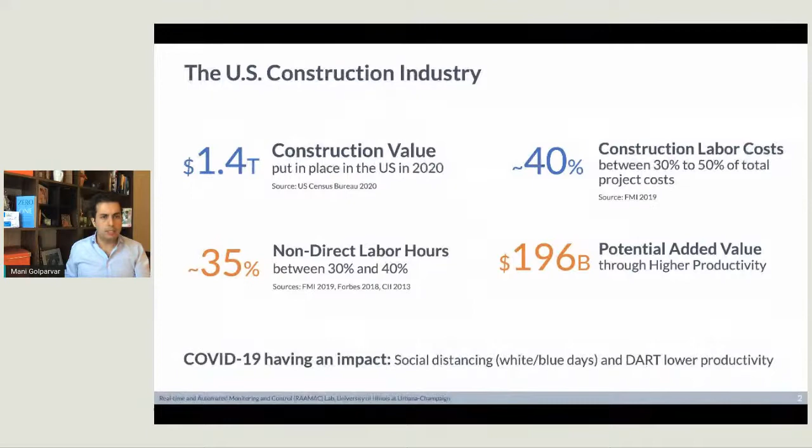But while you see all these numbers, it would be really nice to put them into the context of construction projects—and what that means is impact on the bottom line, schedule and budget.

There are a number of reports over the past few years showing that a significant portion of our commercial projects exhibit performance that leads to finishing behind schedule. A report published by ENR, Dodge Data and Analytics, in 2016 shows that more than 53% of projects in the United States are currently behind schedule, and roughly a little over 60% of them are over budget. When you go beyond commercial projects, ranging from about $10 million to a few hundred million, and get into mega projects beyond $500 million, McKinsey shows that 98% of these projects suffer cost overrun, and a large percentage of them are late. That's quite significant in terms of the performance that we have.

Now, ironically, if you ask owners across the various metrics we have in construction what they care about most, they would respond saying schedule. This is data coming from Dodge Data Analytics. For somebody like me with a construction background, this was actually a little surprising. Of course, no owner would not be concerned with the budget or cost of their project. But in construction, we have many strategies through contracting to control budget. Quality is dictated by the specification of our project. And when it comes to safety, we've hired our contractors and rely on them to keep the job safe. Design is another question asked in the design phase.

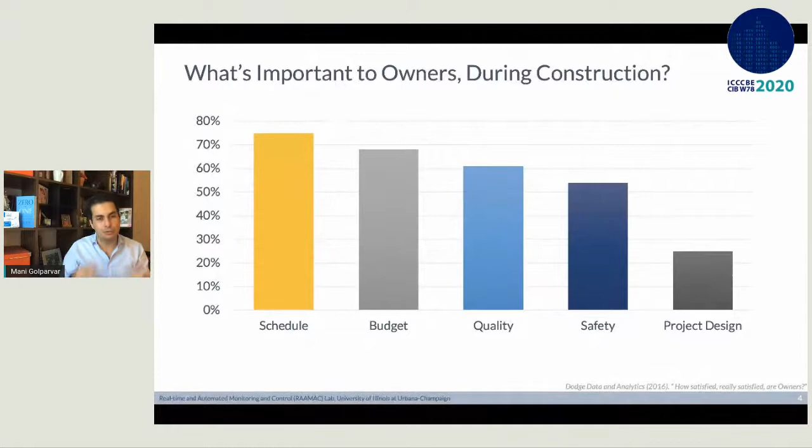For us to better understand why this is really happening to the bottom line of our projects, I want to take you back to what we do in construction in terms of project controls. For many years, we've been promoting how we can support projects by enabling systematic planning practices, performing monitoring, and adjusting performance. Over the past decade, we've seen a surge of projects where lean construction concepts are being adopted and adapted. We take projects through pull planning processes, make the work ready, and try to educate teams on who does what work in which location through daily huddles, and see what we can learn from that performance and improve the basis of the schedule.

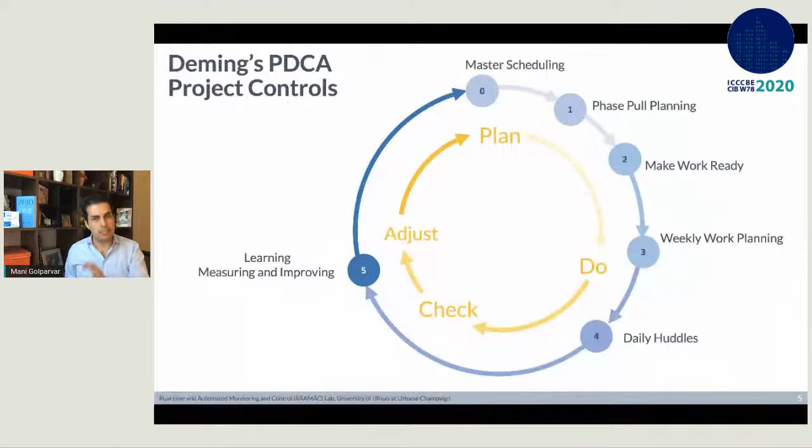So in the context of planning, monitoring, and control, there are four specific problems impacting our performance on planning and execution of projects. Number one: as an industry and academic community, we've significantly improved the basis of how projects can be planned. The concepts of planning and scheduling have been around for quite some time. Over the past, as I said, 10 to almost 15 years, we've seen a lot of these concepts from the lean community actually being practiced today in construction projects.

But anecdotal observation from a large number of projects we're engaging with today shows there's huge room for improvement. Many of these projects where we're bringing in best practices rely on champions to make sure people follow the new culture of adopting lean practices. Many leading researchers in our community, including Rafael Sacks and others, have published a number of publications showing that in the absence of these champions on the project, there's always an opportunity for the project team to revert back to old control practices. So we will not be able to support that.

The second problem is, while we create plans, many of our construction projects and teams are unable to execute the plan. In my lab at the University of Illinois, over the past 14 years, we've been capturing data on the root causes for delay that are impacting plan performance. And there are many reasons. Plans keep changing on job sites. Teams would walk into a room and the work area is not available to them.

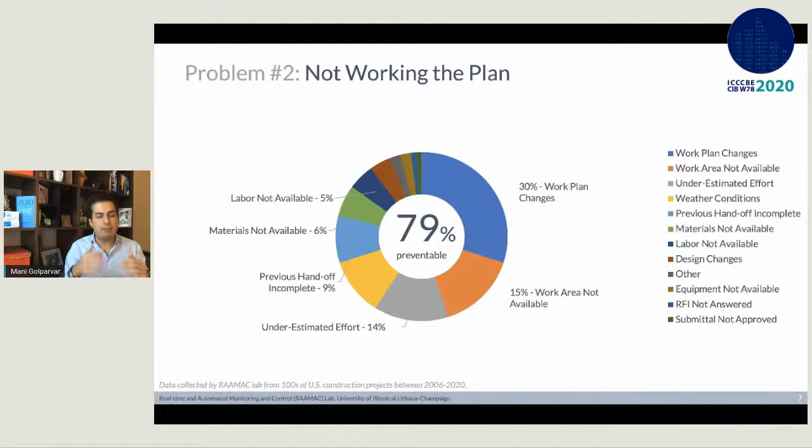Productivity is being underestimated. We have inclement weather days that's impacting it. Our analysis shows that 79% of these root causes for delay are preventable. All we need to do is make sure that the project team understands where the problems are, and they have an opportunity to address those problems proactively.

The third problem has to do with communication and how we measure performance. Many of our job sites, ironically in 2020, still rely on 11 by 17 sheets for people to walk around the job site in color-coded drawings showing how much work has been done in various locations. Of course, we've looked into digitalization, and now people use iPad and Android devices to electronically capture this. But basically what happens is we rely on people to walk around the job site, do the documentation, and oftentimes we don't have an opportunity to communicate that before we all get together in a coordination meeting.

So essentially, from the time the problem happens to the time the owner, contractor, and the subs really understand where the problems are, we've effectively lost a week of work. Now, map this out in the context of the data center projects that I mentioned, you can actually see there's a huge room for improvement with respect to communication and performance measurement.

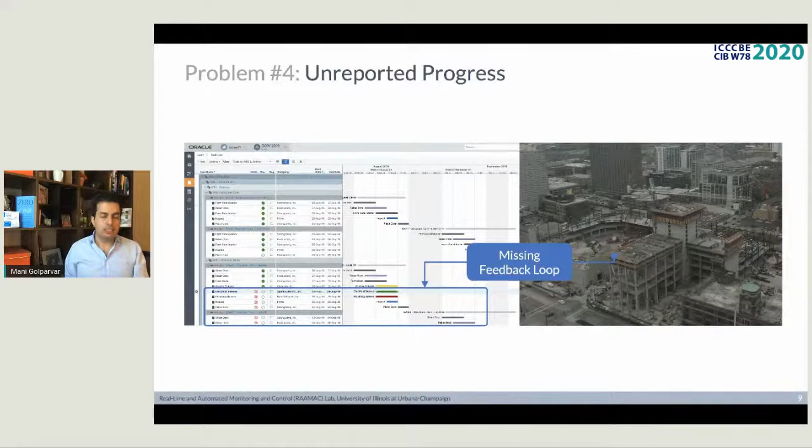And the last problem has to do with unreported progress. Still in 2020, many construction projects rely on regional directors for scheduling who come with these schedules, and they rely on these individuals to go back to projects and help improve the basis of their schedule. What is really missing is that feedback loop to make sure these individuals understand what happens on the job site, bring that data back into the schedule so they have actionable insight that can be used as a basis of improvement. So in the context of these four problems that I mentioned, I was really fascinated to see how we can address them by tapping into emerging and existing data.

I really didn't want to change what we do today with the type of data we have on the job site. So from one end, I was really fascinated by BIM, given the background I had roughly 15 years ago when I was practicing BIM with some of our colleagues at the University of British Columbia, measuring ROI for MEP coordination.

But I was really interested to see how we can tie that into schedule, not just as a 4D BIM, but rather a 4D BIM that matters to superintendents at a production level. So we can set a visual representation of what is expected to be done on our job site every day. We know who does what work in which location, and what is the sequence that needs to be monitored proactively on the job site.

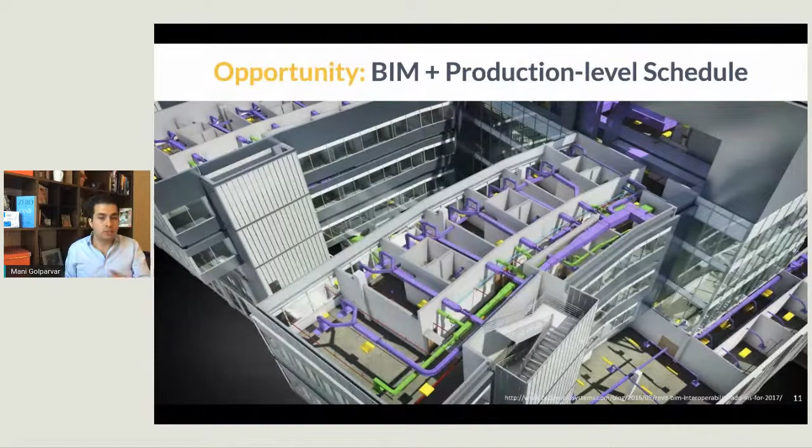Using action cameras or 360 cameras for indoor videotaping is extremely popular these days, especially with contractors in the US. We've seen a surge of drones over the past five years that's basically a commodity now—you fly them and you have the opportunity to capture this visual data. And of course, for more than a decade, as a community we've been leveraging laser scanning capability, but perhaps at a lower frequency compared to other types of data you see.

So what I was really fascinated by was how we can tap into BIM plus a schedule to represent what is expected to be done, and tap into these images and videos that everyone on the job site understands to represent what is exactly happening on our job site. So basically, I wanted to come up with this type of representation where we take BIM, connect that to the schedule, and overlay that on top of our photograph.

So by looking at one picture, if you're the owner, the contractor, or the sub, you can understand what areas are on schedule and what areas are problematic—whether these are actual problems that have happened on the job site or potential problems that are about to happen.

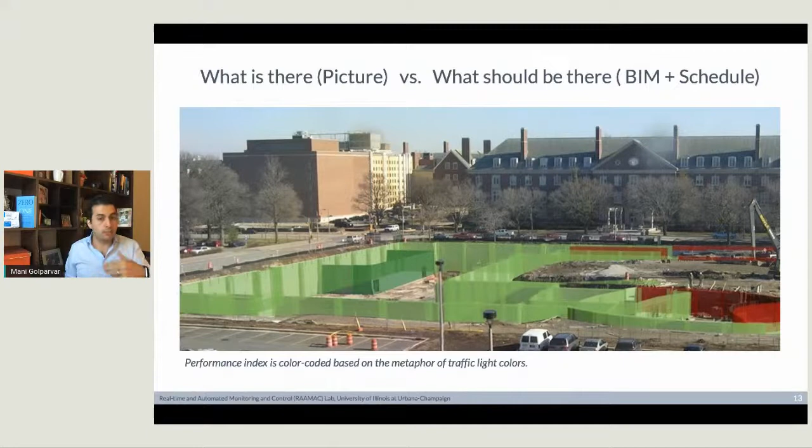And maybe you have an opportunity to proactively address that issue before it happens on the job site. So in the context of that, my research team has been working on the theoretical foundation for a project control system that I would like to call data-driven. But not every type of data is visual.

So of course we wanted to see if we can automatically generate these visuals that we have, see if there's a way that we can automatically align our BIM, or rather 4D BIM, against the photographs. Now, in earlier days, we were tapping into time-lapse photography, and it was rather straightforward. We could tap into some straightforward perspective-n-point algorithm methods that would bring BIM into alignment with one image. And because the camera is continuously taking images, your sequence of data would always be located in the right spot in the context of the image.

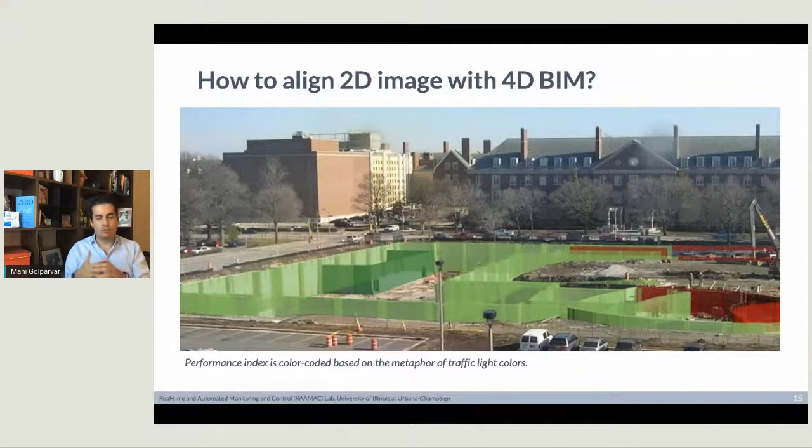But then immediately we realized we're always limited to whatever you see from the field of view of the camera. What is going to happen indoors? We always want to capture images from areas that matter. What can we do with the wealth of images that are being captured around the site? These days, people are flying drones, they're taking images with cell phones, the 360 camera, and nobody wants to use multiple systems. Everyone is passionate about one integrated environment where you can actually map your entire visual data against that design.

So the question, in more academic form, was how are we going to be aligning these images against our 4D BIM automatically? Now, for those of you who may not know much about computer vision, what we do dominantly is use a model which we call a pinhole model for representing images. And what that means is we map out intrinsic and extrinsic parameters for every camera, that in mathematical form is an 11 degree of freedom problem that would map every individual pixel in the image against a position in space in 3D that will be represented with X, Y, Z.

But then this would have required us to understand how every feature within the image matches against BIM at different levels of granularity, which was not easy because, as we all know in civil engineering, modeling is a task of creating an abstraction of the reality of the site. So we mapped the problem slightly differently.

We said, what if we come up with new algorithms, or a pipeline of algorithms, that would automatically organize our images in a three-dimensional environment, generate a 3D representation of the site, find location and orientation of images against that? So now our problem from an optimization perspective has grown. Not only do we have to solve for the cameras, but also we need to find that 3 degree of freedom representation for every point that is going to be mapped in this point cloud representation that we have on the site.

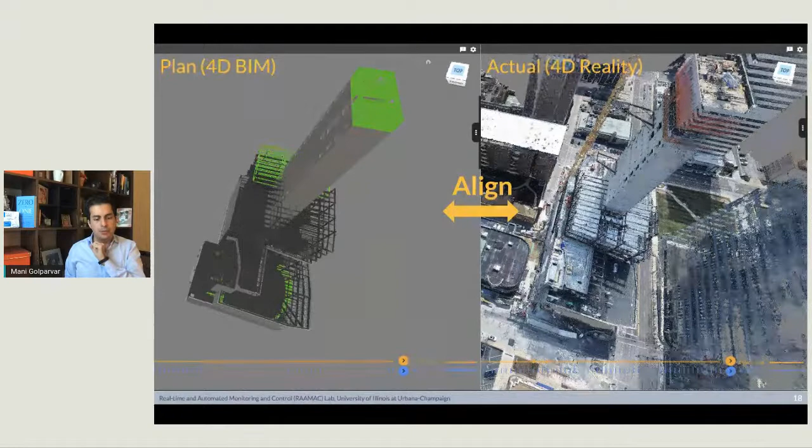Once we achieve that, we will be able to have the reality of the job site on one side, and the BIM plus the schedule on the other side. And then we can work on algorithms that can bring the two into the same environment, where now you will be able to overlay your BIM against that reality.

Now, this entire scene would be in a three-dimensional environment, but I also wanted to do this for images, because if you talk to superintendents, foremen, field engineers, you would immediately realize that they're not very keen to leverage point cloud data directly.

Rather, they like to interface with that data through images and use the point cloud as a basis of measurement. Because we are actually solving for this 11 degree of freedom problem for every image, we now have an opportunity to use that transformation and back project our BIM model into every image.

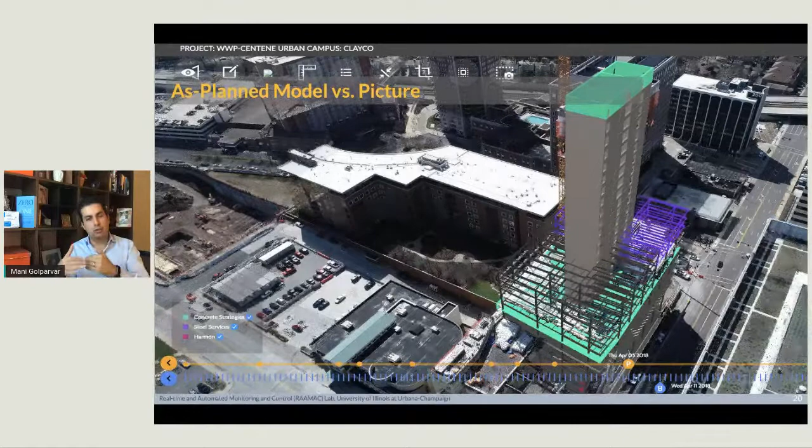So now essentially we can generate augmented images without using any dedicated hardware, where you can exactly see which pixel in the context of the image would match against which element, location, and work package in the context of your model. And all that mapped against the timeline slider.

Once we achieve that, we can start comparing the two in the context of the schedule and see what techniques we can come up with that can automatically color code models - areas, work packages, locations, whatever granularity you want - color coded in red for delays, areas that are on schedule in green.

Not only did we want to understand what has gone wrong or what has gone according to the plan in the past, we also wanted to forecast this into the future. So we wanted to see if we can come up with a body of new algorithms that can forecast risk for potential delay in the future.

So when the project team goes into the coordination meeting, they can really rally around this location that's been color-coded in orange and say, what are the root causes for delays that are happening on this location? What are the constraints that we have? And how can we revise these schedules so we have a more reliable performance? Then perform your weekly coordinations around this meeting.

This system has been scaled today, and it's being used on hundreds of projects in the US and around the world. I'm just showing you one example, and I'll get into the details of that in a moment.

This is with Clayco Construction Company in the state of Missouri, United States, where you can actually see that behind the superintendent's head, the system is being mapped, and there are two locations color-coded in red and yellow. These locations are at risk of delay, and the team is really rallying around these locations.

All the subs and trades that are engaged in these locations are discussing what are the root causes for the delay, what are the things that are not going to start on schedule, so we can proactively avoid these problems before they happen on site.

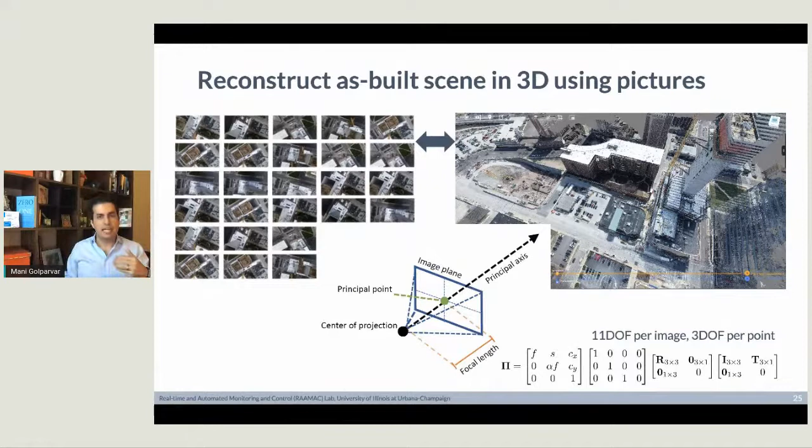So I've already given you a sneak preview of how it looks like, but again, we map this into a computer vision problem, a study that we call structure from motion, in terms of understanding what is the motion that we have between these frames, understand the overlap that we have, and see if we can map that out into a 3-dimensional environment. So we try to do that first.

Then we wanted to work on algorithms that can bring BIM and reality into alignment, and then work on computer graphics algorithms that can simply back project the BIM model into the context of our images.

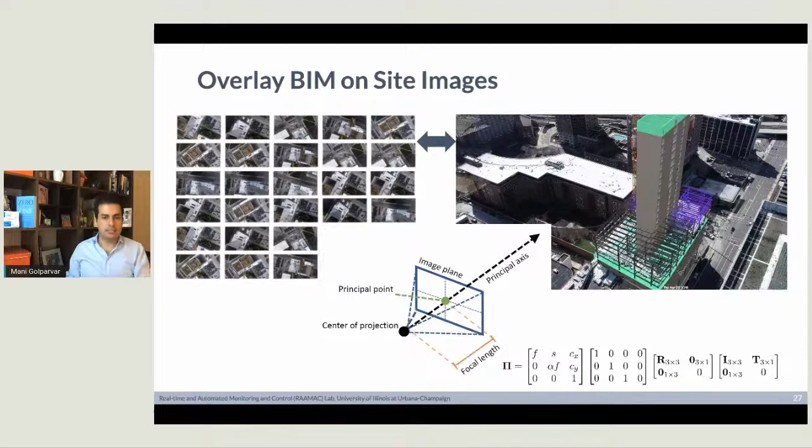So now mapping this out in the context of a computer vision problem, that means our input would be images, and perhaps in these images we can perform what we call a feature detection procedure that can find certain pixels with certain mathematical characteristics that are distinct enough that we might be able to find them in other images.

And the output that we're expecting is the structure, which is the 3D location of every one of these points that we've observed, and also understanding the motion, rotation, translation, and possibly intrinsic parameters of these cameras.

So we can actually map this out in terms of an optimization function where we will try to initialize the problem by triangulating the points in the 3-dimensional environment and then back projecting them in a 2D form. So let me stay at a really high level and walk you through the procedure.

So more than a decade ago, we started working on these algorithms that treat every one of these images that we have on the job site, regardless of how much overlap they have, to see if we can find these distinct features.

Then we wanted to see if we can find a mechanism by which we can match them in a pairwise fashion, see if we can find consistent motion across them through some model fitting algorithm that we call RANSAC. Fundamentally, we will be looking to fit an epipolar geometry that in computer vision terms we call the fundamental matrix, which guarantees that we are not being challenged by the redundancy we typically see in the design of our infrastructure systems.

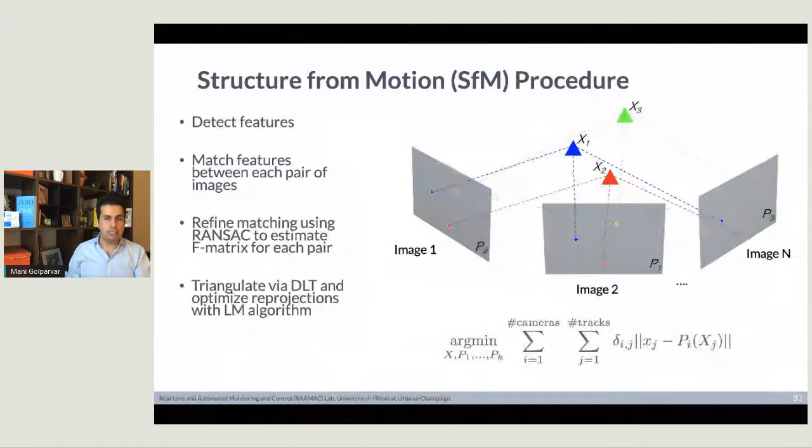Once we have these tracks formed based on our features, we will be able to triangulate them using direct linear transforms, back project them into every one of our images, and solve for this optimization problem that I'm showing you on the screen using a Levenberg-Marquardt algorithm.

What this procedure does is give us an initial representation of the points in 3D, and it finds the right orientation and viewpoint of every image in our three-dimensional environment. Then we will be able to use this in a pipeline of dense reconstruction plus model fitting capability.

What that means is that we will look into photometric consistency across our images. This type of method requires structure from motion output, what I described before, as an input to the process. So we can actually triangulate these positions in a three-dimensional environment, and generate the basis of a dense representation of the scene.

Now, obviously, because of the limitation we may face in terms of visibility, we want to fit surfaces into certain holes, and there's a whole body of algorithms for surface reconstruction. For example, you can fit what we call Poisson surfaces into the generated models.

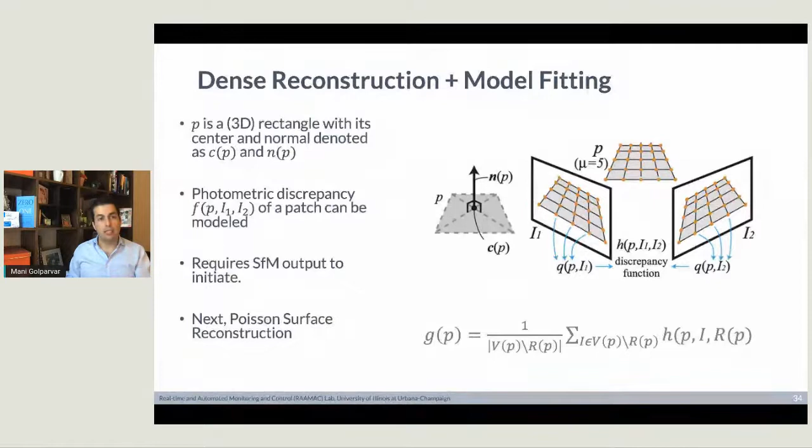So once you apply this set of pipeline algorithms, a structure from motion followed by some form of multi-view geometry, and some form of a mesh modeling algorithm, you can actually provide deliverables for construction projects. And these deliverables will be the following.

Regardless of how images are captured, whether with a drone, a 360 camera, or a camera fixed on a tower crane, we will be able to map the job site in a two-dimensional form, 2.5D, which is an orthophoto with depth information, and at the same time map that in a reality scene. So I want to show you one example from the project I was showing you earlier.

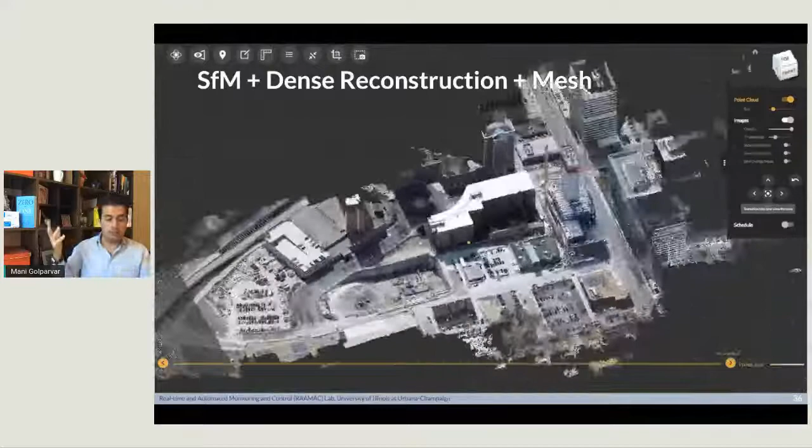If you recall the project where the team was gathering on the largest screen, it was actually a $150 million project in St. Louis. You can see a high-rise structure on the right side, a concrete structure with a parking garage on the left side, with that big excavation hole you see on the corner.

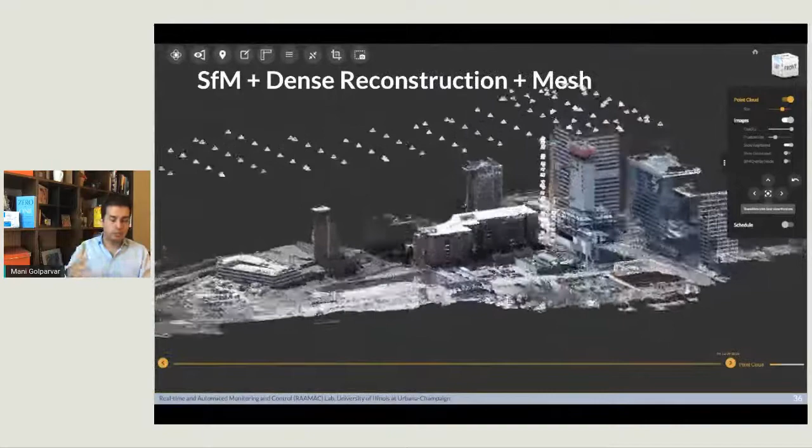In this case, all kinds of images were being uploaded into the system—images taken with a drone, images taken with a cell phone—and the combination of them is being mapped into a three-dimensional scene. It gives you this image-based experience where you can click on every one of these individual images and dive into a high-resolution image.

And on that image, because you have the point cloud as the backbone of your system, you can perform measurement. You can measure length, you can measure areas, volumes, and use that as the basis of your communication.

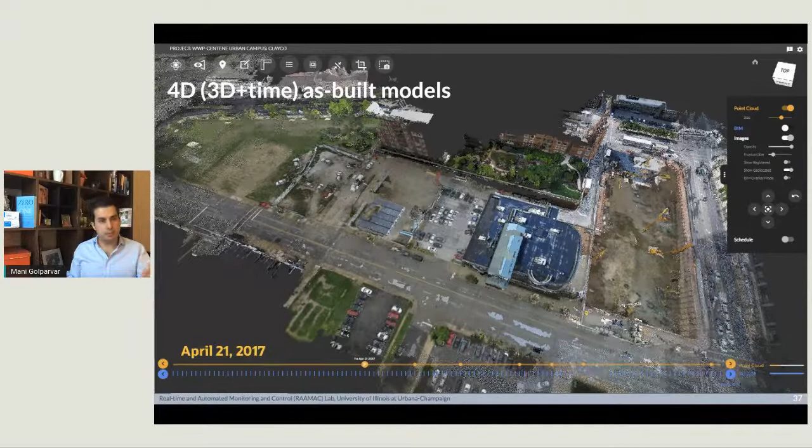Of course, we wanted to do this over time, so maybe the team would be interested in performing the capture once a week, or maybe it's a fast-paced project, so they want to do the capture every day. So we wanted to create a scalable architecture that would let this type of system work over time.

So we worked on a number of algorithms that would tap into this type of consistency that we see in features, because not everything changes every day. And we created a KD-tree structure around these feature descriptors, roughly a 128-dimensional vector space, and we would adopt a number of search algorithms.

In this case, for example, we use a fast approximate nearest neighbor search, and we would use that in the context of an optimization process. So every time a new set of data is captured, we can actually use the model from the previous capture.

What we would do is match the features from the new capture against that. And when we are running the optimization, we would add that constraint of the match to make sure we can actually optimize registration of this point cloud against the previous one.

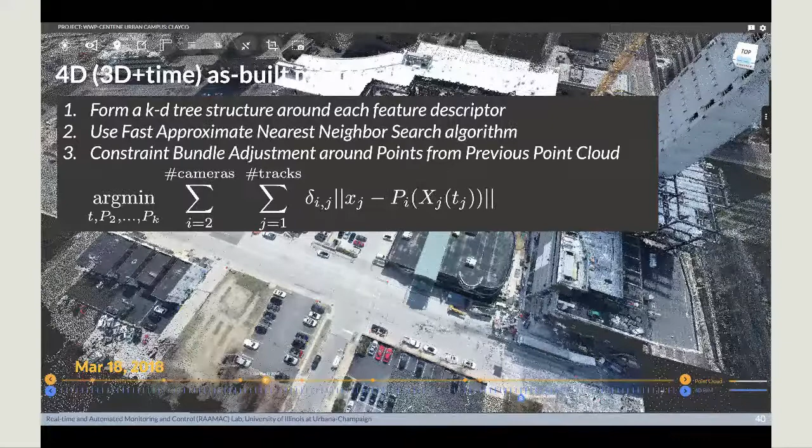So now we can actually generate four-dimensional models. Fast forward some seven to eight years that we've been working on these algorithms, these systems are being used at the commercial grade.

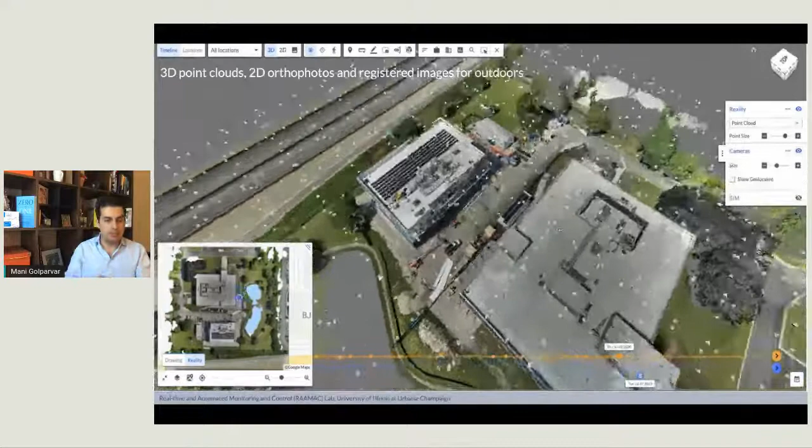So this is an active project in the city of Chicago in the United States, where Oracle, the company that offers the Primavera solution many of you are familiar with, is actually using this platform at a commercial grade for their own project. You can see there are many orange dots on that timeline slider, each showing one day of capture on the job site.

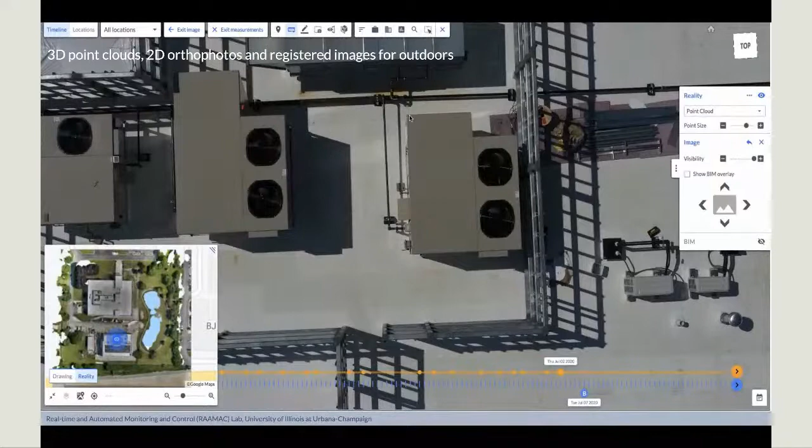You can dive into any of these images, and leverage the 3D scene and the 2D navigation map simultaneously to perform your measurement, documentation, and management of the scene.

So what does it look like in 2D? Let me take you to the 2D interface. That means you can overlay your deliverable from the computer vision process over your Google Maps, especially if you have GPS data or use ground control points.

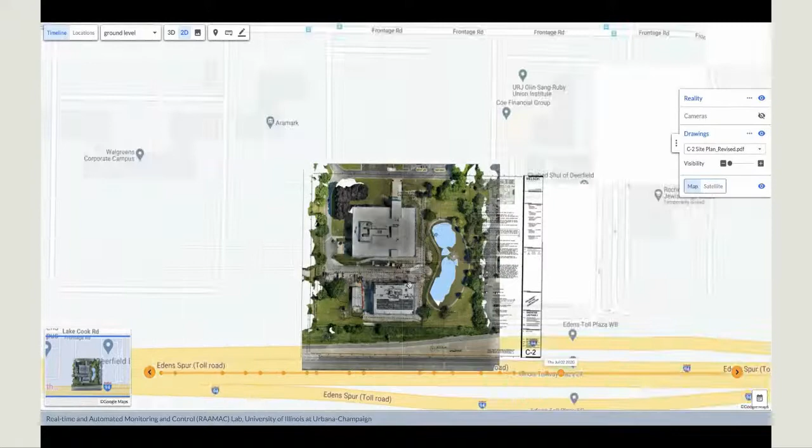And if you have 2D drawings, you'll be able to also overlay that on top. So now you can see reality against the plan, not only in 3D, but also in the context of the 2D environment that I'm showing you.

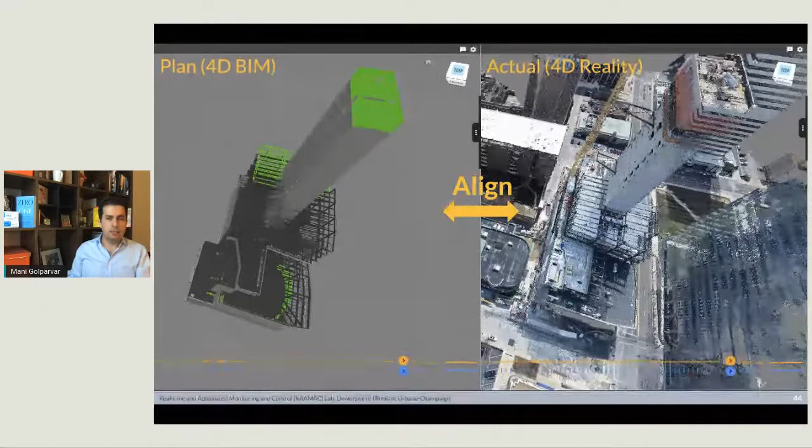So now that I've shown you some of these capabilities, I'm going to speak about how we're going to enable the alignment of images against BIM. Most of what I've mentioned so far is the ability to map the scene in a three-dimensional scene. For solving the alignment, initially we wanted to automate this, but we've gone back and forth on this, and I'll get into the details.

Basically, what we will be asking every project team to do is introduce a number of control points. At minimum, we need a total of 3 control points that can solve for this 7 degree of freedom similarity transformation between our BIM and the up-to-scale point cloud.

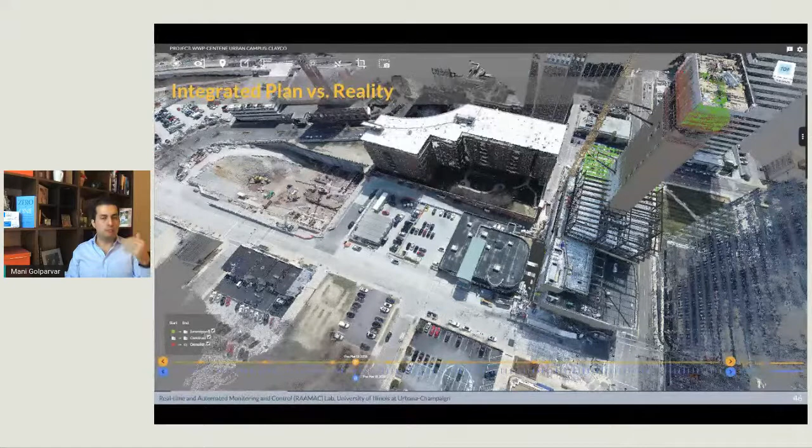Once we have that, BIM can be matched against reality, and because the reality models are being mapped over time, you'll be able to automatically achieve BIM against image alignment, regardless of the date.

So now you can explore a time machine that you can go into every location you desire. You can focus on that image, change the date, find the most relevant images over time, and see your BIM model being automatically overlaid on images.

Now, scaling this up for every project, no matter what type of data they have, no matter how much capture they perform and at what frequency, we had to work on a number of optimizations. I'm not going to get into the details, but there are a number of algorithmic optimizations we've introduced to the process by changing many steps happening in this pipeline of algorithms.

This is one of our works that was published in Transactions on Mobile Computing in IEEE, showing how more modern frameworks for structure from motion can enable faster performance. In this case, we're able to come up with methods that are 10 to 12 times faster than the state of the art, while our method shows consistent or rather smaller differences.

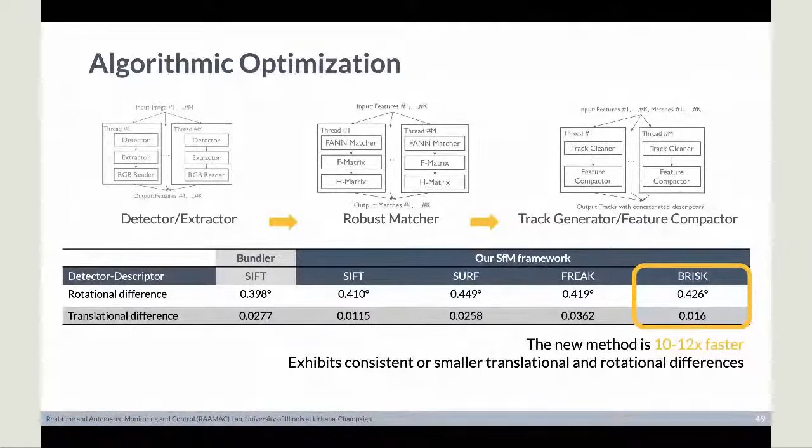We were able to benchmark orientation and viewpoint of every image in our validation process against the ground truth. Once we had this optimization done, and a system that was really working, we implemented it at scale across the board.

We use this in the US, in California. We use it in Illinois. We used it in Japan with Taisei Corporation and many other organizations that you see. Roughly, we reached a total of about 126 captures in early days.

We realized we really need to figure out a number of things to support this process. One, we want to make sure we have techniques that can easily render these point clouds, regardless of their size. I had the opportunity of working with Jacob Lin, who's now an assistant professor at National Taiwan University, to come up with a level-of-detail system on how point clouds can be rendered in an octree form so we can visualize them in a web-based system. You see some of those examples here.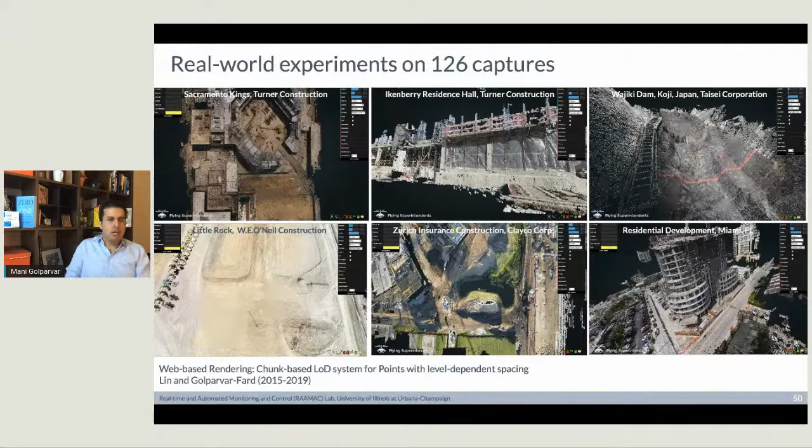But we also realized that following our standard structure from motion does create a few challenges. One, there's never a guarantee on completeness of the scene. Often we provide guidelines on how capture should be done, but there's no guarantee. You would end up having locations that are exposed as a hole, meaning the team has to go back and do more capture.

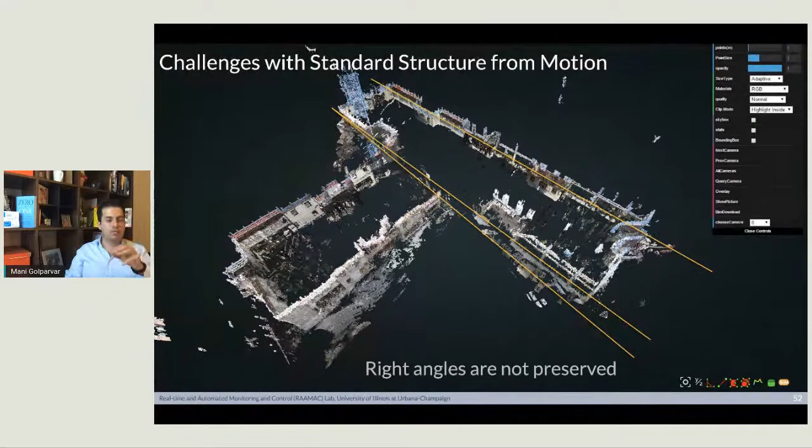The second problem was, because we are running this optimization, we may run into issues where we're really not optimizing for the global problem we're solving. So we're getting stuck in that local optimum problem. And what that means is that there's going to be drift, or loops that are not going to be properly closed.

For those of you who've been working with computer vision algorithms, when you're working on reconstruction from images, we always have this issue where our transformations, seen without using control points or GPS data, will be up to scale. That means it's unitless, so we can't measure that. So instead of following conventional computer vision algorithms, we thought, what if we try to bring something from our computing and civil engineering back into the computer vision domain?

What is that information? BIM. Of course, our project teams are always using BIM as the basis of design. What if we try to leverage the geometry and semantic data we have in BIM to improve how we actually generate point clouds from images and videos?

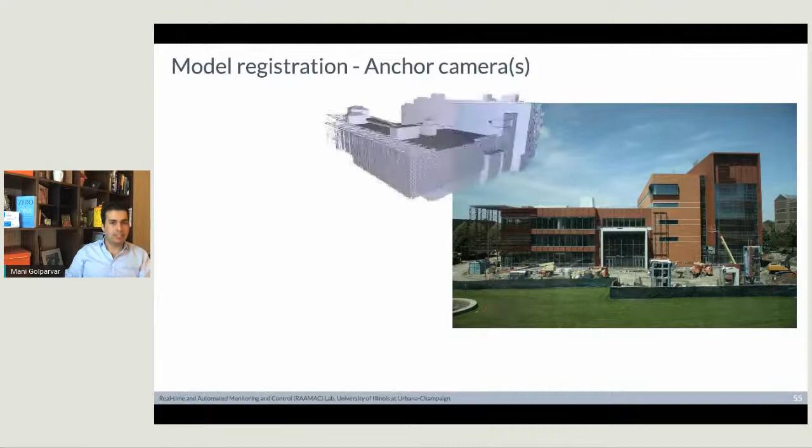So instead of using BIM after the 3D reconstruction, what if we find a way to automatically find the most informative images on the job site? Maybe we can call them anchor images, and then bring our models into alignment against these photographs.

So we would pick a few anchor cameras and solve for this perspective-n-point algorithm problem, where the BIM model would be overlaid on some images with the help of manual input. Once we have the anchor camera, we can figure out how every other image we've had on the job site can be brought into alignment.

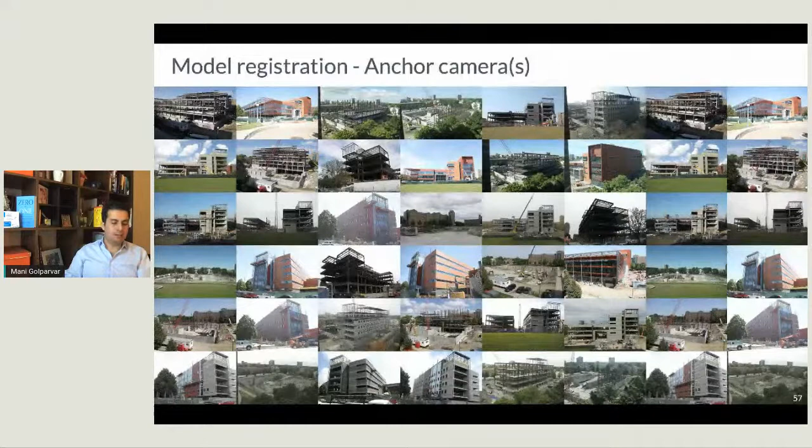So basically, that anchor camera would be introduced as a constraint in our problem. Instead of following a standard bundle adjustment procedure in structure from motion, we can map this into a model constraint structure from motion, or in our terms, BIM constraint structure from motion. And what that does is optimize our process.

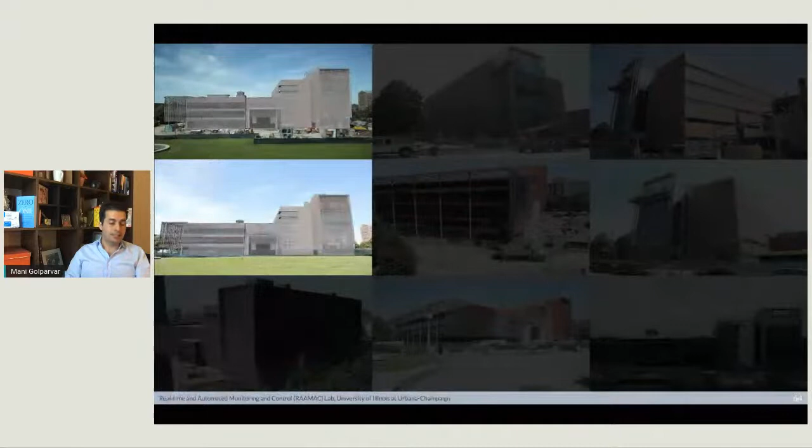Let me visually show you what that means. We would start with an image where the user guides us on how BIM should be brought into alignment. Then we go into our optimization process, which is completely automated. The rest of the images, one at a time or in groups, will be aligned. If the system fails to bring some images into alignment, we bring them back to the user so they can help with more distinct views that don't have enough overlap.

So this procedure was able to reverse the problem for us. We would use BIM as a starting point. And of course, we had to benchmark to see what contribution we could bring back into computer vision and computer graphics.

Now, in more modern terms, Microsoft at the commercial grade came up with a solution called Photosynth, based on a structure from motion algorithm done at the University of Washington. This is the state of the art. We had to benchmark our performance against standard data sets called Middlebury, and also introduce our own construction data sets, and we were able to perform well.

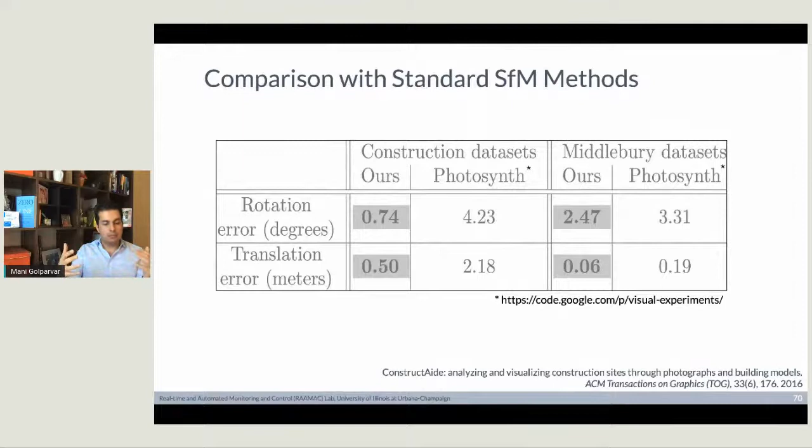As you can see on the data, using validation metrics to measure the error on rotation and translation, we can actually see we lower the errors that typically happen. So what does that mean? It means we can minimize those drifts that we used to see.

So when it comes to aligning our point clouds against BIM, we can have more modern methods that improve the basis of this registration. That was our first finding: that BIM, as a constraint, can lower these drifts and keep the angles upright for us.

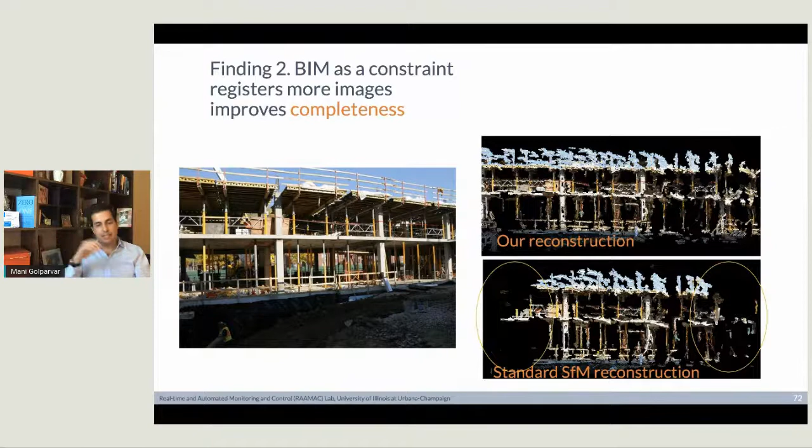The second finding is that introducing BIM as a constraint can actually help us register more images. I'm showing you an example, one image from a data set, where we ran this using our standard structure from motion procedure alongside a complete reconstruction. As you can see, we were able to improve the basis of that.

Now, in earlier commercial grade applications of this solution, we were dominantly focused on outdoors. We were hoping people would come back and say we could always go back to our laser scanning practices for indoor mapping. Or we thought, at some point, maybe we'd be able to bring drones in, thinking a little immaturely that the magnetometers placed on the drone wouldn't impact navigation capability.

But while we were working on these algorithms, 360 cameras came out. These cameras are extremely popular with construction teams because they're low cost, simple to use, quick to capture, and really scalable. You can put them on a pocket, mount them on your hard hat, and walk around.

So we've actually looked into how we can optimize these algorithms, so now for not only indoors but also outdoors, you can place your camera over your hard hat, walk around the job site, and do a complete video capture. Now, these videos can be imported into the system.

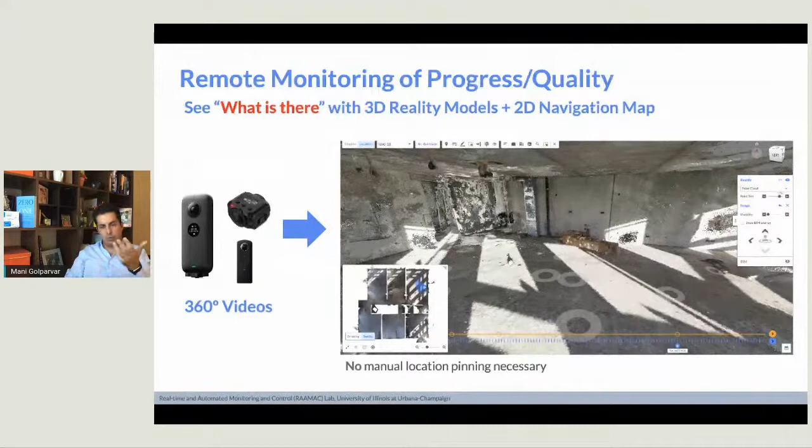So now we can actually create more of a Google Street View experience, where we place these donuts that are a subset of frames extracted from the video, and automatically generate a color floor plan, that ortho photo I mentioned before. Of course, a point cloud is being generated, but users don't necessarily need to see that — they interface from an image perspective.

Then we tapped into bringing models, and intentionally we decided to adopt an API that would bring many different file formats of models, as opposed to constraining ourselves to the more academic type of representations we used. This is how it looks in terms of the 2D representation.

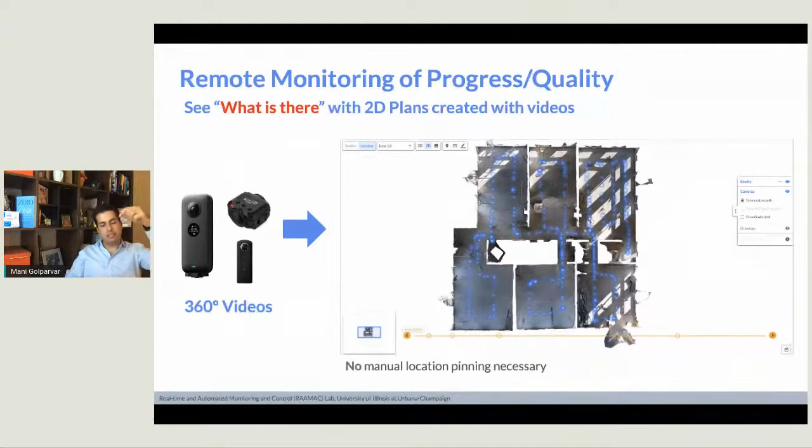So every location on the job site, for example level 15, 16, 17 on the building project, you would have a color floor plan, and you can automatically see locations mapped against that floor plan. When project teams bring their 2D drawing, we can also map that against that environment.

So now we can create this entire street view experience from the same type of capture, but this time indoors. As you can see, I'm showing you a project captured with a 360 video. The video is transformed into a reality model. Images are the interface. As I'm walking between these donuts, you can see a little point cloud rendered on the scene, but everything is entirely in 3D because of that point cloud.

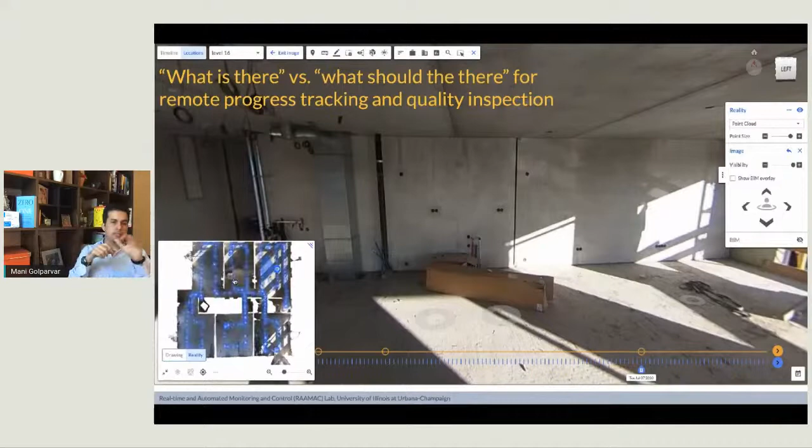And what that means is that on any of these images, I can perform my measurement. I can select any of these points and use inference from images, so every pixel from the image becomes measurable beyond the completeness of my point cloud. The navigation map helps me navigate myself on the job site.

As you can see with COVID-19, this is extremely popular these days. People are actually using this for remote monitoring of progress and quality. You can orient yourself against a 2D floor plan, so you can jump between different views as it relates to that floor plan, and interact with the system entirely from that perspective.

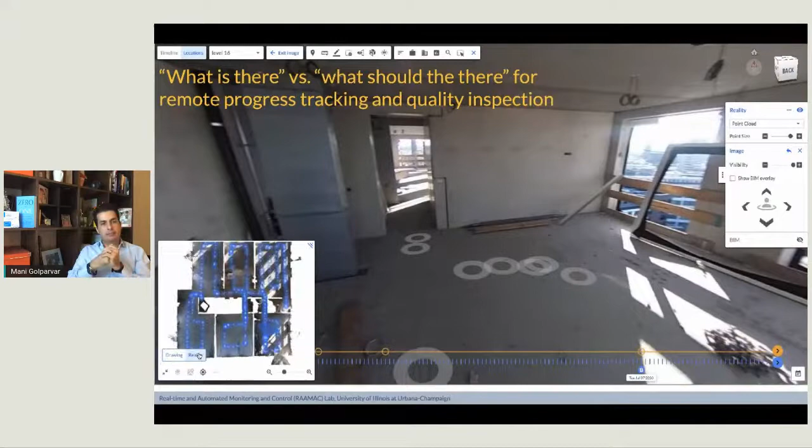You can also see this from a point cloud perspective. Let me play that a little bit here for you. What I'm going to do is put us in a first-person mode so we can walk around the job site, so you can get a feel for the completeness and density of these models being generated.

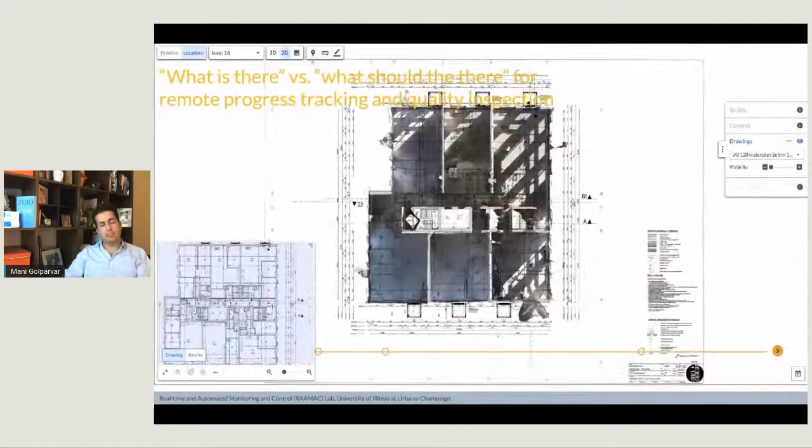Now, everything I showed you was in 3D. This is the 2D representation of that, and that means your reality data in 2D can also be mapped against the design data in 2D. So if you have individuals on the job site more oriented in 2D, you don't have to restrict yourself or require them to use a model that may not be IFC issued for construction necessarily.

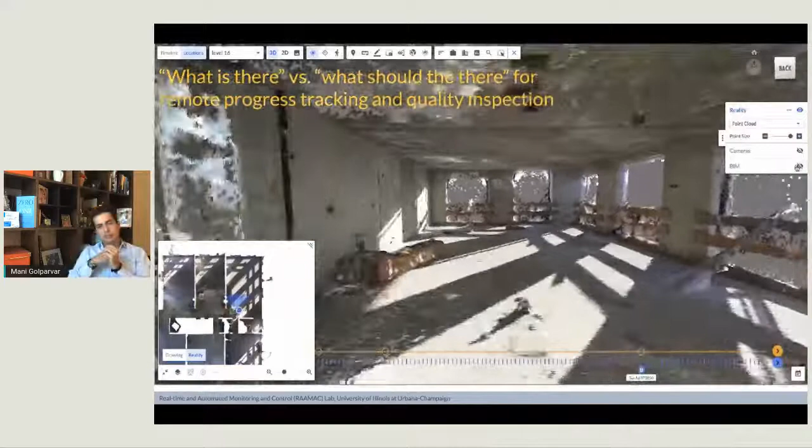So now we're going back into the 3D environment and we are activating BIM. Your point cloud and BIM are integrated within a web-based environment. You can go into any of these images you desire, and by playing with the opacity and transparency in the scene, you can use BIM as an overlay. You can select any components and tap into the metadata in our BIM model and contrast it against the reality — what is there on the site, your picture, versus what should be there.

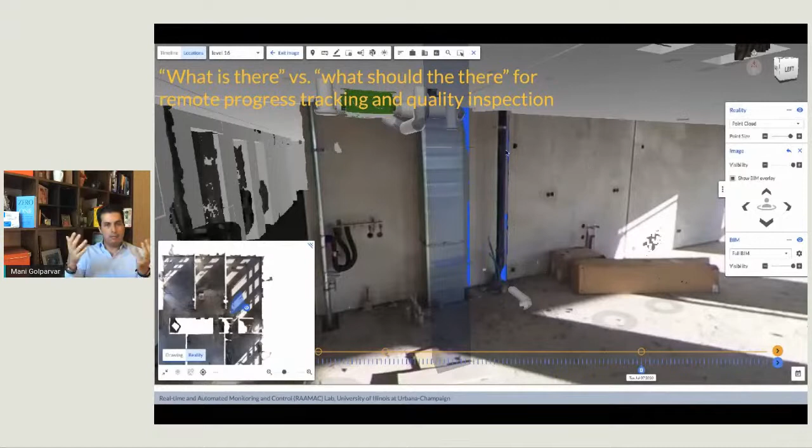And depending on how accurately you've brought these two models into alignment, you have something you can use as a basis of your measurement. So you can annotate it and document any quality issues. This system, as I mentioned, is also being used at scale on many of our job sites. I've shown you how we can bring BIM into alignment with the reality model. I'm going to speak a little bit about how to automatically track progress.

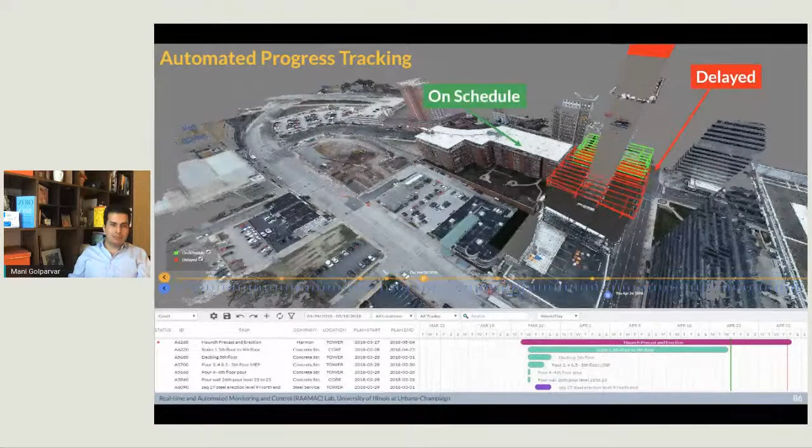So once we have that data, regardless of your interface between 2D and 3D, the question was: can we automatically recognize how much work is being done? About 10 years ago, we worked on a paper published at the International Conference on Computer Vision on how we can reason about visibility and occupancy of the scene, mapping this into a machine learning problem where from BIM and images, we can get a sense for where physical presence exists on the job site or is expected to exist, and contrast it against the reality.

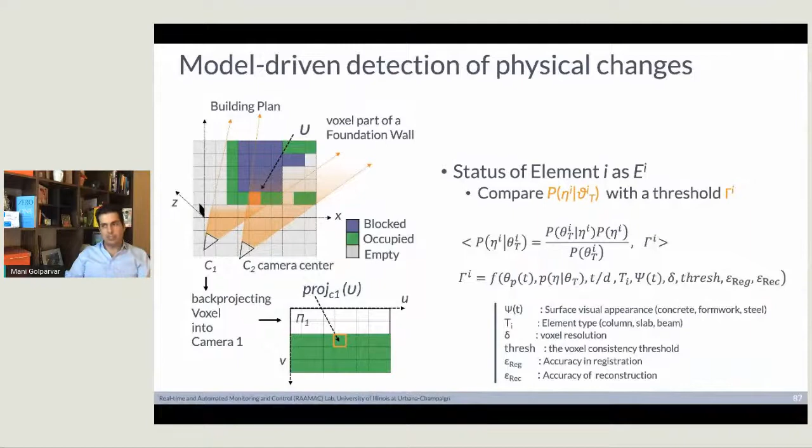I'm not going to get into the details, but in early days we mapped this into precision recall and realized that we can get somewhere between 80 to 90% detection accuracy. From an academic perspective, this was a great result, something publishable. But in terms of being able to use that for practice, it had a lot of room for improvement.

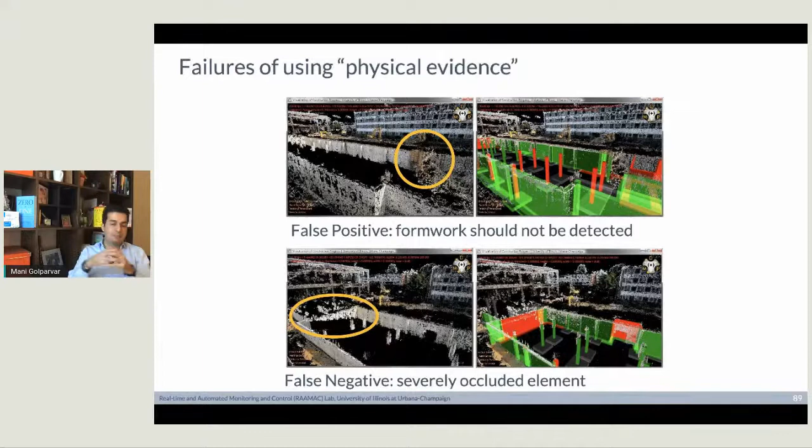Let me show you some failures. If you use physical evidence to track progress, you would end up having false positives, where, as you see in the top left example, formwork is wrongly detected as progress on the job site, so the element is color-coded in green. Or notice the bottom example, a false negative, where that element was expected to be detected but we didn't have enough visibility, so the system isn't able to handle occlusion properly.

So the first question we ask is: is there a way we can improve our ability to recognize progress by tapping into appearance data? Now, this is not entirely a computer vision problem. There's a lot of issues within our computing in the civil engineering domain that still can be addressed.

One challenge was, if you have to recognize progress, let's pick concrete structures as an example. You should be able to recognize concrete against reinforcement bars, against formwork, against waterproofing, against insulation. That means your schedules should have enough detail to recognize these different granularities of work. Your BIM model, regardless of discipline, should have the right maturity in terms of LOD to represent these details. And lastly, we need a formal way of representing these sequences - what is it that we are expected to see for concrete, drywall, and so on.

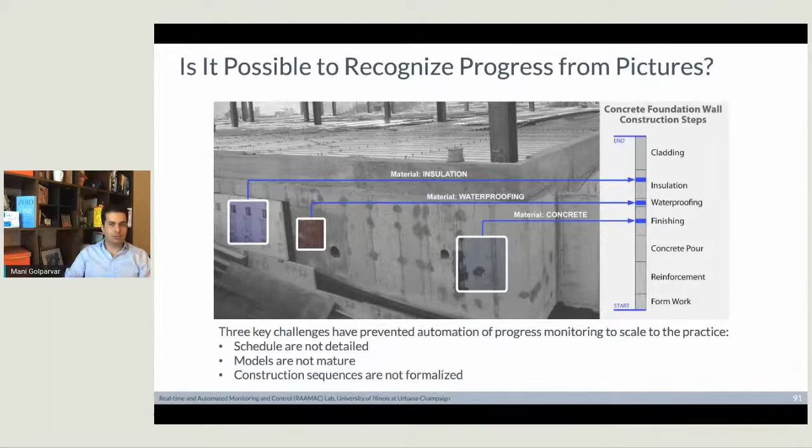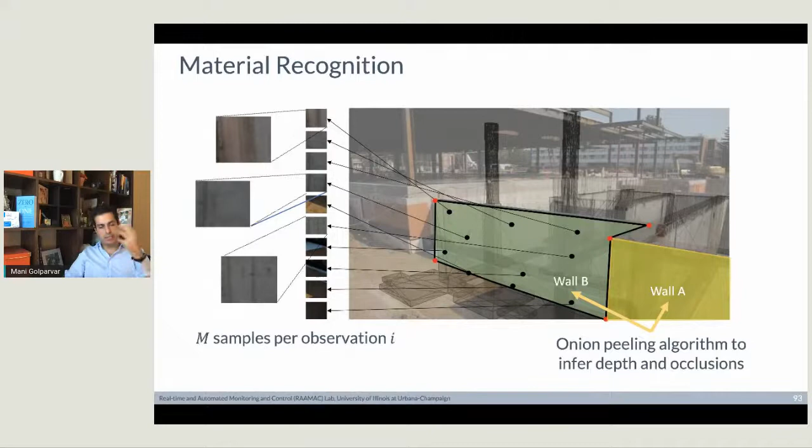So we mapped this into a multi-view inference problem. What I mean is we wanted to see if we can back-project the BIM model into every image - think of Photoshop. We wanted to Photoshop parts of the image that correspond to our BIM elements, tap into the material we expect to see in each one, and take samples off of them. With many of these samples, we can map this into a multi-view inference machine learning problem and see if we can recognize what we see in the pictures and, beyond physical recognition, recognize what kind of materials exist on the job site.

So we formulated the problem as follows: we want to solve this material recognition problem, and we've done quite a bit of work in this area. This is the latest work we did, published at the Conference on Computer Vision and Pattern Recognition in 2016.

The idea was to see if we can tap into geometry and appearance data at the same time. We mapped this into a deep learning problem, but instead of treating deep learning as a black box, we wanted to take the output of the last layer, concatenate that with other features captured from dense scale-invariant feature transforms mapping texture plus color in hue-saturation-value form, concatenate them, and pass them into a supervised discriminative classifier to see if combining geometry and appearance can improve how we recognize progress and materials.

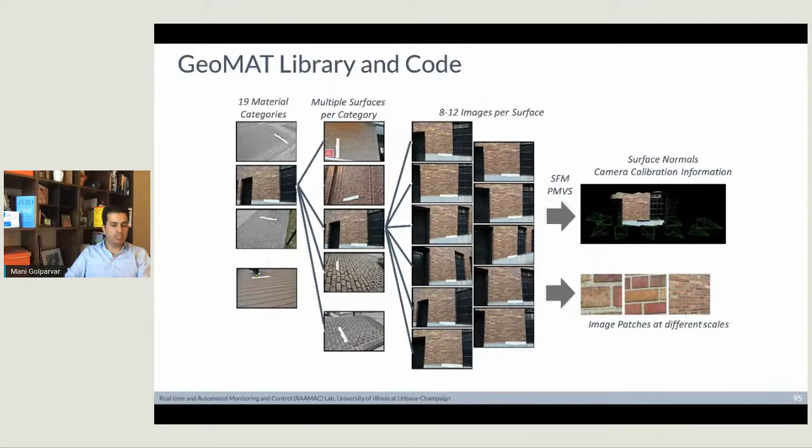So this has actually been benchmarked against the state-of-the-art for texture and material recognition in computer vision, and for those interested, you'll be able to tap into that. As you can imagine, we had to introduce a new library of materials and code so that if others are interested in building upon this work, they'll be able to tap into our code and use the data for future research.

We brought this back into the same problem of construction monitoring, so we were able to use that to see if we can improve the basis of recognition. This solves the first problem I mentioned, which is now maybe beyond geometry, we can also look into appearance and see if we can improve the basis of our recognition.

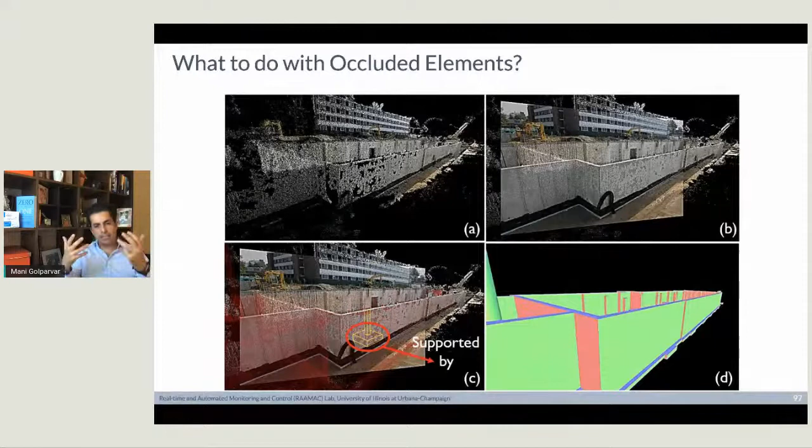The other problem we wanted to solve was how we're going to deal with these occlusions. What I mean is, if there's a foundation and there's a column that we see, is there a way we can leverage the interdependency between the elements, so that an element that is severely or completely occluded can be recognized as work complete?

So we went back to the literature and came across a classic work done by William Ibbs and late Diego Echeverri at the University of Illinois back in 1991, who were fascinated by automation of construction planning and looking into how constraints for sequencing can be formalized. We thought, what if we tap into these relationships and see if we can learn them by tapping into the model? So we looked into how we can tap into IFC schema, the type of inter- and intra-class relationships between components, bring these formal sequences out, and use that to improve recognition.

I'm not going to get into the details, but this is a publication in the Journal of Advanced Engineering Informatics, where we were able to improve the basis of recognition by another 6%.

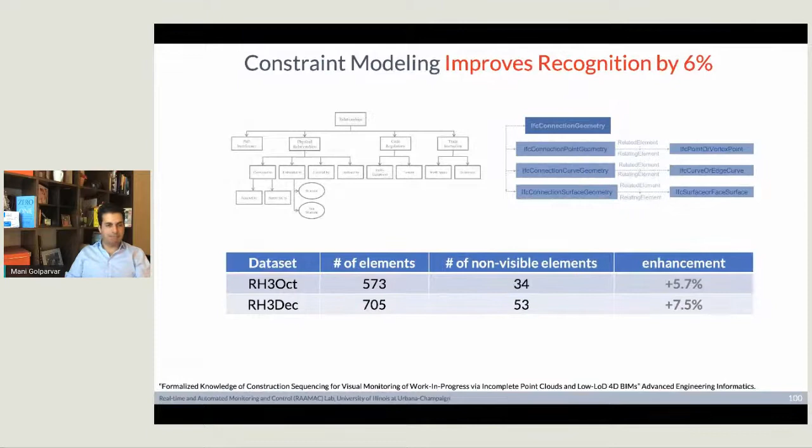I showed you how we can automatically track progress, but I haven't mentioned how we can identify risk for delays. What I mean is, is there a way we can map these rates of production being captured on the job site, so we can go back and color code locations based on risk for potential delay? This is rather new work that we've been performing for about 4 or 5 years.

Now we're about to be publishing this work after it's been commercially offered through a number of platforms that we've released to the public.

We've introduced a number of metrics that, in very simple terms, track rates of production on the job site and map this in the context of work packages and trades. So for tasks about to start, we measure their readiness, and for tasks that are ongoing, we measure their readiness to be completed on time.

Then we use a new formulation to map risk at the location level by assuming that tasks are mutually exclusive, but are dependent on one another in terms of locations, and we're able to highlight risk at the location level.

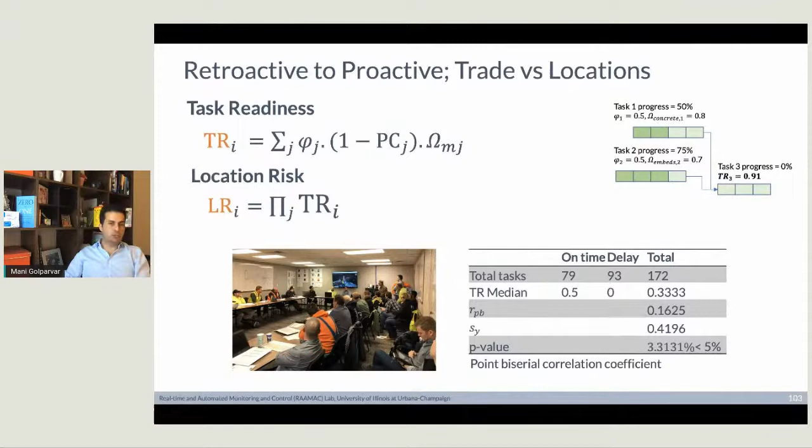So what does that mean in practice? It means if we can scientifically solve this problem and bring it to practice, our project teams can go into a coordination meeting, and instead of going around the room discussing what went wrong or right over the past week one company at a time, we can rally the team around one location at a time.

This is a project team in Chicago, and you can see on the screen there are 5 locations sorted based on severity of risk for potential delay. The team is discussing what are the root causes for the delay.

You can see the superintendent for concrete actually standing up and engaged in the conversation on how we're going to tap into changing our schedule so we can proactively address the source of the delay that we see on the job site.

So we actually benchmark performance improvement using construction metrics, beyond the computer vision or AI metrics we typically use for validation. We're able to show this project team that in the span of 6 weeks, after doing a control phase, introducing the platform, and then measuring performance, we were able to take them from percent plan complete of 46% to 70%.

With the platform, all they did is really bring transparency. You can actually see where the problems are, and if you take action, of course you can improve the basis of performance.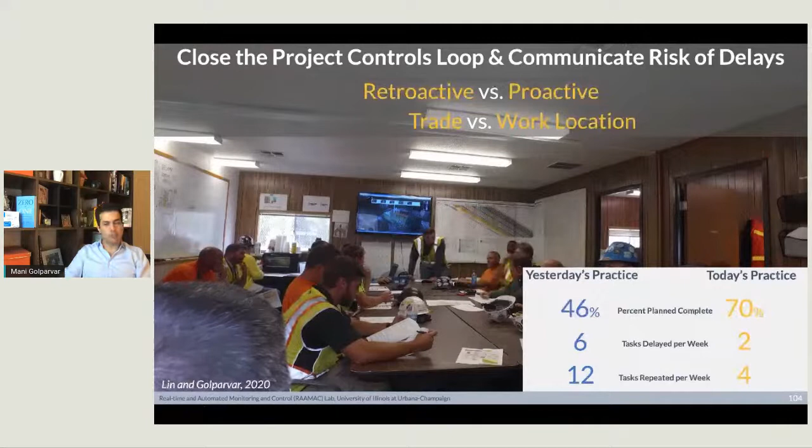Now this system is also being used end-to-end in other projects, so I'm going to present a second case study, which is also available for download. On a project in the state of Georgia, we were able to map performance over an entire duration of 12 months.

And the team leveraged the system, and they were able to finish the project 4 weeks ahead of schedule, which is a significant improvement compared to the numbers we're showing you in terms of average performance in the industry.

But they also wanted to see what the impact is on every persona on the job site. Does it help the superintendent improve the basis of updating progress? Does it help minimize scope change orders, because now it shows you what is there versus what should be there? And does it help us with remote monitoring?

Now, this is before COVID. With COVID, this type of solution is extremely popular, to not go to the job site and remotely monitor progress and quality. So again, we're able to demonstrate that there's room for improving the basis of remote monitoring by 50% for a number of stakeholders engaged in this project.

Everything I've shown you has already been commercialized, and now it's being used after the research we've done over the past decade. What I'm going to speak to you about now is some of the things coming out of the work I've had the opportunity of being engaged in.

One question was, is there a way we can improve data capture? As simple as placing a 360 camera on a hard hat on the job. There are many job sites where people just don't want to walk around to do the capture. So they come to us and ask, is there a way you can help a drone autonomously navigate?

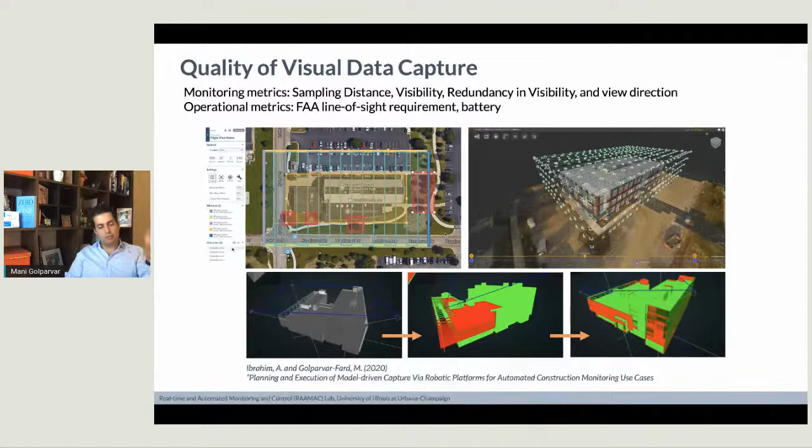What it means is that if you map this out in the context of a BIM model, you can see your model color-coded based on whether your mission for the capture, on a drone or ground robot, can achieve the metrics you desire on the job site.

So I can show you an example of this prototype. This prototype has been used in the US and Japan by Taisei Corporation. I'll show you an example here in the US, where the user initially creates a flight plan in 2D.

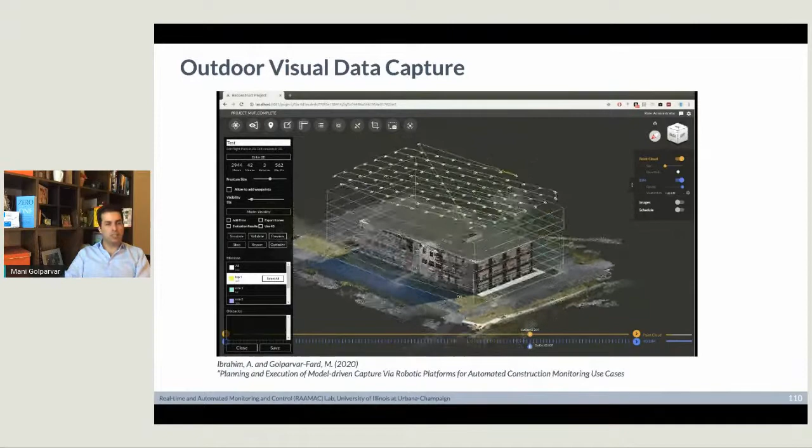Then you'll be able to see the flight plan in a 3-dimensional environment against previous point clouds and the BIM model. So you can explore that, adjust it, and then run an optimization that provides you with a new input on how to revise your flight plan, feeding that automatically - today, only with DJI drones that can achieve the type of resolution and other constraints I mentioned.

Now, of course, you won't be surprised if people approach and ask if you can do this on a ground robot. Now, I don't do any hardware myself, and I'm not interested in that component of the work at this stage. What we've only been working on are operating systems that can be mounted on any robot that can provide visual surveying capability and visual capture.

So we acquired this ground robot and mounted it with 2 very cheap laser scanners at the back. Each of them costs only around $150, literally $150.

There's a 360 camera sitting in front of it. A user with a joystick would manually operate this on the job site. It would learn a map, and then you would run it through the algorithm I showed you before, so we can create the most optimal plan for operation and use that as a basis for repeating the work. This is actually ready for demo.

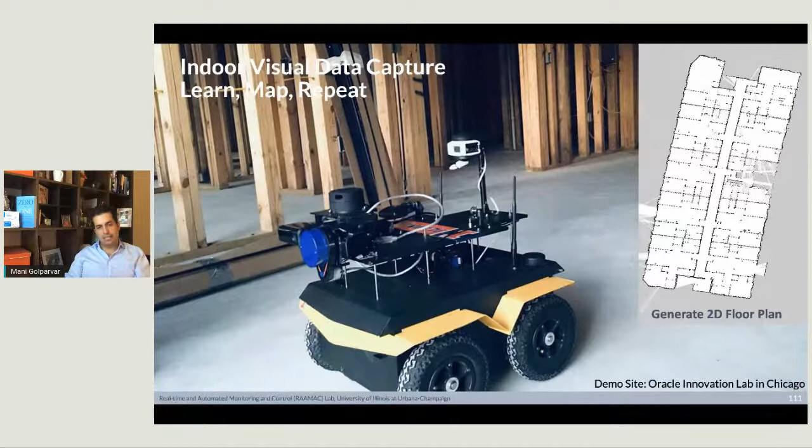If you ever visit us in Chicago at Oracle Innovation Lab, many construction companies that visit that lab see this system being demonstrated by Oracle as one of our partners.

You will not be surprised that we've also been approached to see if this can be mounted on other robots. We've had the opportunity of being a partner to Boston Dynamics and Faro. Both of them have been great partners, and we are exploring to see if this modality of capture can support all of the analysis I showed you before.

I love this platform, but it comes at a cost. The ground robot costs roughly around 72 grand, and then you obviously have to add the element of the laser scanner on top of it.

The other problem we've learned is it's great to show where the risk is, but can you tell us how we can introduce changes? So we tapped into more analytics on the schedule. One of my students, Fouad Amer, and I have been working on bringing back some of our old techniques in scheduling, but mapping this out in terms of natural language processing and machine learning.

Can we tap into our historical record of projects and see if we can learn best practices and offer a recommendation? So no longer just color coding orange for risk, but once you see the risk, we can give you the top 5 recommendations on how issues can potentially be addressed in the future.

Everything I've shown you so far has to do with progress monitoring, bringing that as feedback to the plan, and the basis for control algorithms. There's more work we've done on detecting and tracking workers, equipment, and recognizing their activities that I don't intend to get into in this presentation.

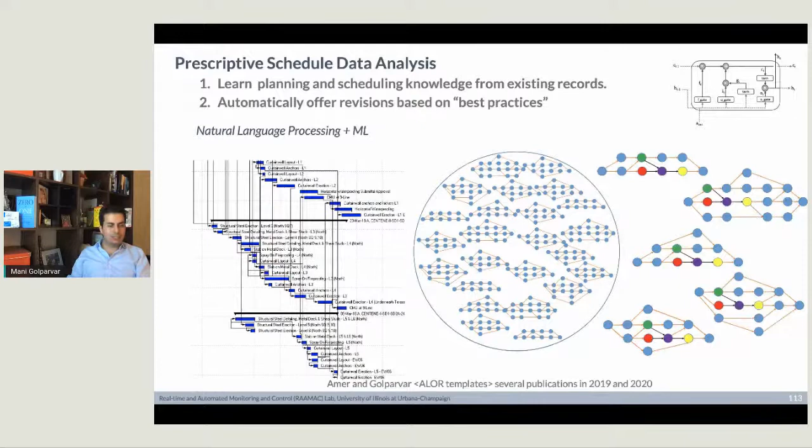So I want to leave you with a few takeaways. On the technical side, as much as we've been working on applying some of these AI techniques in construction, there's always room for bringing some of our own contributions in computing and civil engineering back to the AI domain. One, I showed you on the 3D reconstruction side that our knowledge of geometry, our knowledge of civil engineering, and what we do in computing can actually improve the basis of many algorithms for reconstructing scenes.

I showed you a number of techniques where a combination of geometry, appearance, and reasoning using structured data can improve the basis of recognition. And when it comes to inference, I've shown you how potentially natural language processing can be applied, so instead of relying on many techniques that go back to the 60s, earlier systems of AI for planning can be improved so we can automatically provide revisions to the schedule.

The practical significance of this is pretty simple. All we do is tap into existing data that project teams already have, images against models, to see how we can improve the basis of planning, and how we can coordinate and communicate the schedule.

And it's really all about transparency. If project teams can really see where the problems are, perhaps they can proactively address these problems before they happen. I showed examples of improving the predictability of a schedule.

I didn't get into quality much. And of course, if you have any owners on the call today, or if you interface with owners, I'm sure you appreciate how this can potentially support payment applications and billing processes. So this is really a solution that brings win-win for every party. It puts the owner, contractor, subs, and designers on the same page on where the problems are.

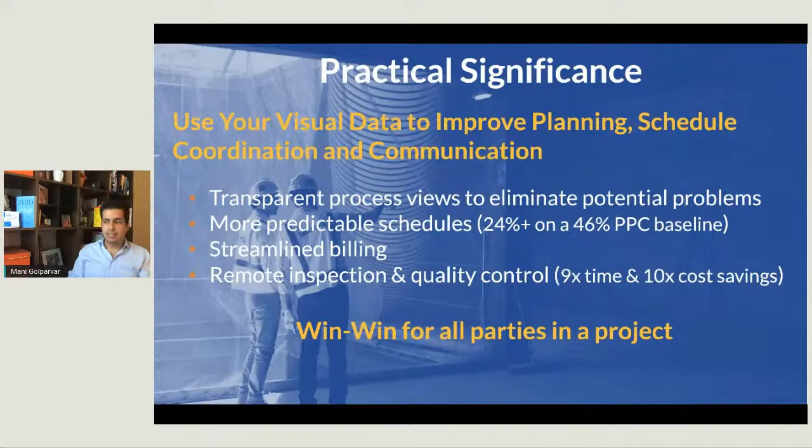So now that I've spoken about the technical problems and practical problems, I just want to take a moment and speak a little bit about the path forward. I think this is a really exciting time for all of us in computing and civil engineering, and we're just starting a great conference on that.

In the US, AI is at the national spotlight. President Trump put a task force last year to explore how investment can be made more on AI so we can tap into more enterprise-grade applications. But as you can imagine, when you talk to folks that are pure AI, they tend to focus on problems that are constrained by huge quantities of annotated data.

That simply doesn't exist in construction. We all think that it exists, of course it does, but it's not directly and readily available to us in the academic community, for reasons I'd be happy to speak to. I've had the opportunity of teaming up with a team of 9 other researchers at the University of Illinois and Carnegie Mellon to see how we can actually bring this AI back into AI in construction, back to the AI community. The AI community is really excited about this opportunity based on some of the works that I've shown you, because different from conventional AI, AI folks would have to be constrained with the application logic.

So when you look into the learning loss, for those of you who are actually working on machine learning problems, you can see the application logic would actually be controlling this formulation of the loss. And there are many data problems that are not easily exposed, but when you bring it back into core basic AI, there's a huge room for improvement. For those people who are at the core AI, they see this as another opportunity.

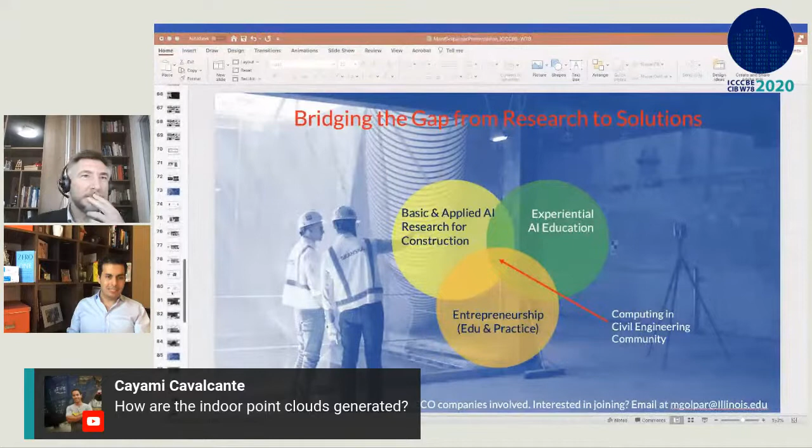I want to go back to one of the slides I showed on what we recommend today for indoors. It's fascinating. When I started working on outdoors and generating point clouds, I met a great project executive out of Tennessee, and he told me, most of the time our superintendents can walk outside of the trailer and see what's really happening out in the field. Can you give us a system so we can see what's really happening indoors? Because that's where it matters most, since we want to be coordinating our trades indoors.

So I showed you the spectrum of capture mechanisms that are possible. The most dominant type of capture for indoors is using 360 cameras. We also like 360 cameras because you're not limited to the field of view you get with a perspective camera. Often when working indoors, you're confined to limited corridors and viewpoints. A 360 camera can maximize visibility and capture features.

And if you use videos, you can tap into temporal continuity in the data, so you can look into simultaneous localization and mapping algorithms beyond structure from motion. We've brought these concepts into equirectangular images captured by these cameras, and this is now the most popular form of mapping reality using 360 cameras, because it's simple. All you need to do is turn the 360 camera on, put it on your hard hat, walk indoors and outdoors, and enable capture.

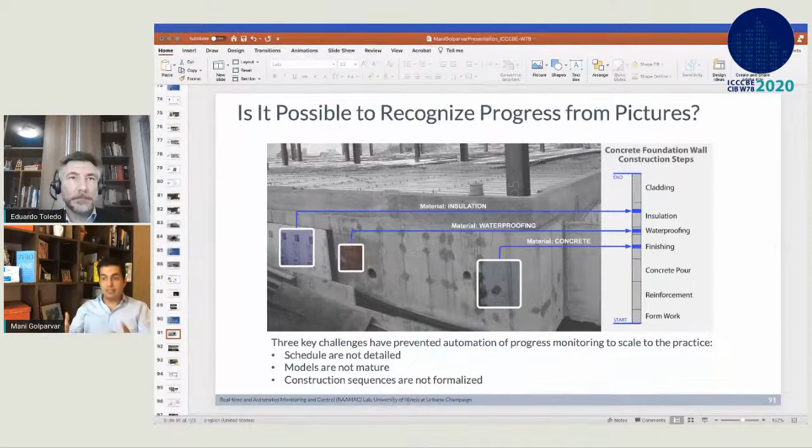So now, for the first time, we have an opportunity to back-project BIM directly into images and automatically create annotated data at a size that matters for these deep learning algorithms. The second opportunity is really synthetic data. We've looked into environments such as Unity and Blender, so we can photorealistically render models using a library of pictures we have in model authoring environments such as Revit. That also provides another opportunity.

But data matters, data is king, and with deep learning algorithms being treated as black boxes, I would not be surprised to see some of these areas explored at the right academic level, while we get a lot of competition at the commercial grade.

Second question that you've asked, an excellent question. The question is, can we come up with open training data? Absolutely, I think it is possible.

It is going to take a significant amount of effort. We've been exploring that in the context of ASCE, DSA, Data Science, Sensing and Analytics community with Professor Nora El-Gohary, my colleague, and a few others. We are trying to figure out how we can unlock that opportunity.

But commercially speaking about it, this is extremely challenging. If you talk to construction companies, they think that their IP is their data. If you talk to technology companies, that's the same. Oracle is a great partner for us, but it is going to be extremely difficult for us to tap into millions of schedules that have accumulated over the years.

So our approach to this is really establishing this consortium that I mentioned toward the end of my presentation. I've had the opportunity of working on this for the past 12 months, and we'll be launching this initiative later this month. For the next 2 years, we'll be specifically focusing on what problems we can solve from an academic perspective, how IP can be formulated so data can be easily shared without violating anybody's IP, and how we can streamline this work between academic research, startup research and development into solutions that the industry can use.

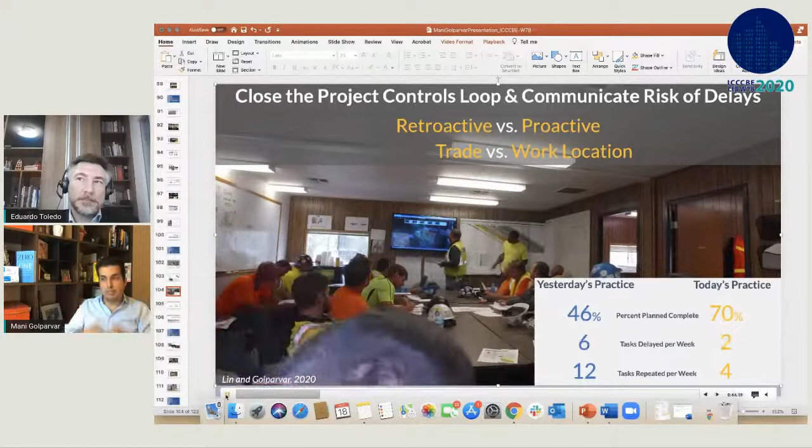Oftentimes, people contrast it against the fragnets that you're using P6 for managing risk. They also want to see that in the context of PERT or probabilistic scheduling, however you're formulating it. There's a lot of things that can be done on this end. Software companies that are active in the scheduling space, including Oracle, are also very interested in this. We are exploring that. All I've shown you is what we've already published and is publicly available for use, but beyond that, it is more at the research level at this stage.

Thanks for the question. Taking into account RM is a transversal process that crosses different processes, I'm not sure if I'm really following the question, Eduardo. Can you help elaborate? I think she's interested in how risk management and project management are interrelated, and how complex that relation is.

Let me share a perspective that was a new way of thinking about this. I had the opportunity to work for Turner Construction, the largest construction management company in the US. One fascinating piece of feedback was that a large company like Turner has regional VDC managers who focus only on MEP coordination and pre-construction assessment, seeing VDC as one bucket of work. They also have regional managers focused only on lean. So they've completely decoupled proactive project management practices from the model-driven practices we desire to see. One great observation was that we want to establish synergy between the two, and have our teams start talking to one another because we see that opportunity.

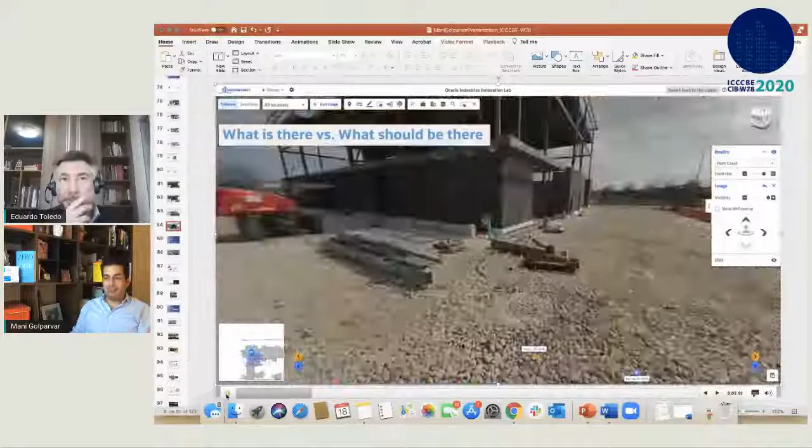Let me give an example, and I'll show you one video on this question. We work with Pepper Construction in Illinois, and the owner on this project is Oracle. It's fascinating because they fly drones every two weeks to get a high-level view of the job site, but they also use a 360 camera indoor and outdoor. What they want to do is integrate all of it together.

So what we did is first map it with a drone, then use the outdoor point cloud to bring that into automated alignment with indoors, since the outdoor capture was connected with indoors. The rest of the point cloud optimized against the outdoor point cloud was automatically aligned. Then so many changes happened on the job site that the visual data had a lot of disparity, so we used BIM through that manual process I explained to bring it into alignment. It's really a combination of automation and some user-assisted guidelines that can bring all this data together.

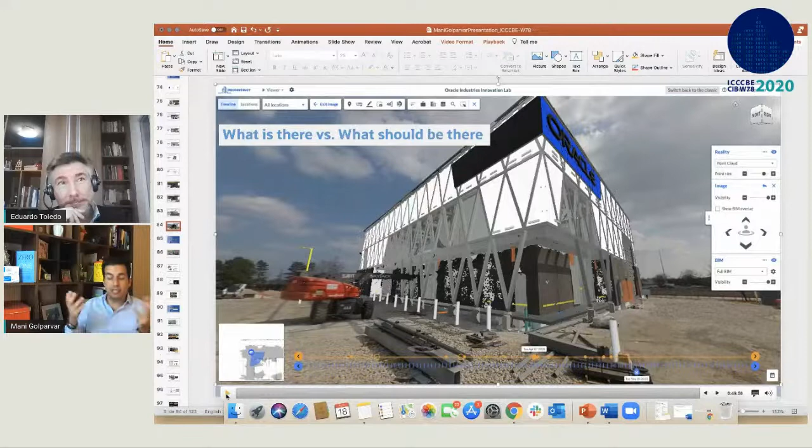This is being practiced on hundreds of projects at a commercial grade, so we've figured out workflows that can easily enable this with very simple interfaces. If you check the website for this platform, you can see quite a few demo videos on how this type of indoor and outdoor alignment can be done automatically and manually at the same time.